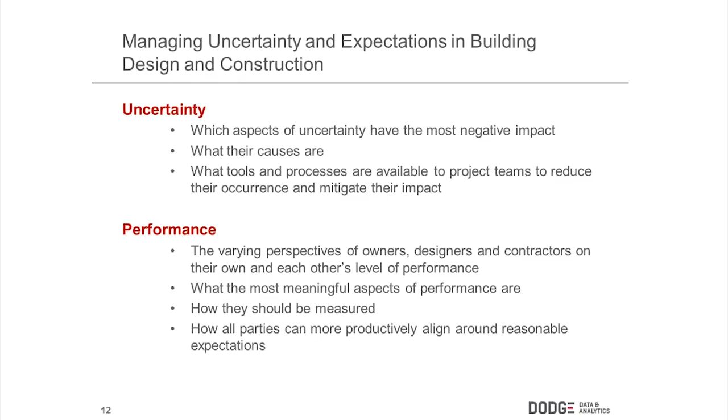So the hope we had for this was to give everybody in the industry some objective data so you can initiate an actual, honest, mature, grown-up discussion with a client early in the process, and acknowledge the fact that you're building a one-of-a-kind prototype outdoors with a lot of baked-in uncertainty.

It is inevitable, and there is a range of reasonableness around the cost and performance impact of that uncertainty. What would then be realistic performance expectations between all parties on this particular project that we're all about to embark on? Is there new design solutions?

Is it a tight labor market? Is it an accelerated schedule? Is it a difficult site? Are we doing anything unusual that's going to create more uncertainty? Let's acknowledge it in advance and not wait until it causes a problem, where everybody else is expecting perfection all the time. And then, what are the top factors to pay attention to?

And then what are the ones that really don't move the needle, so the team can identify and manage risk rather than avoid and transfer it. So much of the contracting strategy in our industry is all about avoiding and transferring risk. We're taking the position that it's much better to identify it and manage it, and then look at what opportunities we have to mitigate that and improve performance.

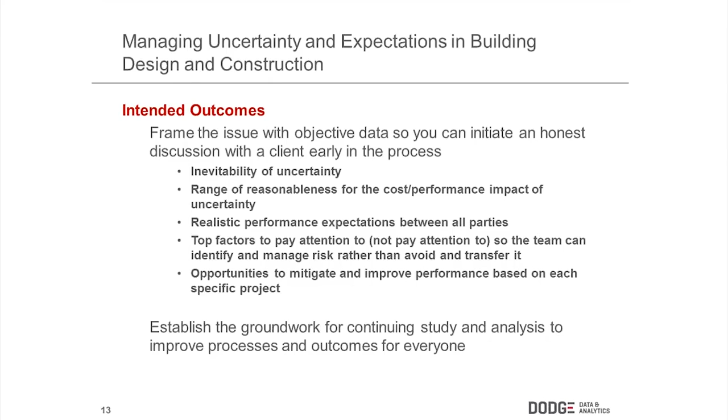So we're hoping to establish the groundwork here with what I'm calling taking the invisibility cloak off of the elephant in the room around uncertainty and performance. And hopefully we're going to take it to a next stage beyond this, so I'd be interested in anybody's thoughts afterwards about that.

So here's how we did it. We did it with 3 different parts. First, we did an association survey. We went out to all those associations you saw, plus a bunch of others, and asked if we could send a survey to their members. We got over 2,500 responses back from owners, architects, and contractors.

That was really to try and identify what were the major issues we should focus on in the next round. The next round was a telephone survey, and that's really how you get your best results in research, because people are guaranteed to complete it and you can capture all the nuance of their answers. So we took the targeted top issues that came out of the association survey and did this targeted phone survey: 155 owners, 82 architects, 72 contractors, all in the United States.

We did a representative range of company sizes and project types, and made sure that most of these folks were involved in complex projects—at least half of their work—because that's where you tend to get most of the uncertainty and then most of the problems.

We've woven their comments throughout the whole report, and as you'll see today, I'll show you some of the highlights. The report itself is broken into 3 major pieces: understanding uncertainty, dealing with performance expectations and the metrics thereof, and lastly, opportunities for performance improvement. I'll take you through some of the highlights, but I encourage you to take a look at this.

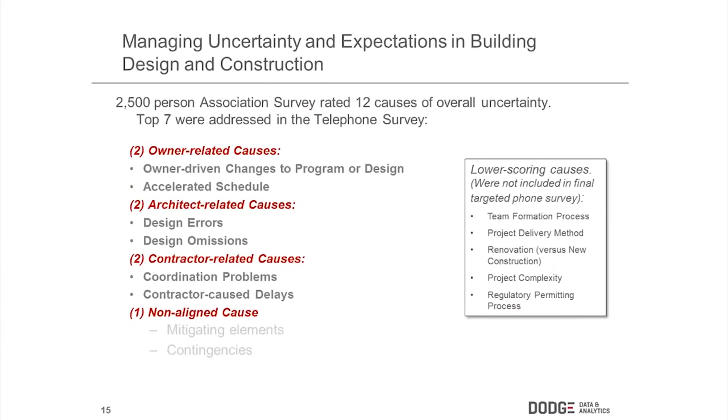So let's look first at understanding uncertainty: what are the top drivers, and how is it specifically impacting quality, cost, and schedule? In the big survey, we went out with 12 different causes of uncertainty and asked people to rate them for us. It was pretty interesting because the top 7 really came out very strongly, with a big drop-off to those you see on the right, which weren't rated as things that move the needle in terms of causing uncertainty.

When you look at those 7, they tended to break down into groups. Two were very clearly owner issues—owner-driven changes to the program or design during the project, and setting an accelerated schedule. Two were definitely design-team related—design errors and design omissions. Two were very much about the build team—coordination problems and contractor-caused delays. And the last one is really a non-aligned cause: unforeseen site or construction issues, things nobody anticipated, but when they happen, you have to deal with them. Those are the top 7 out of the 12.

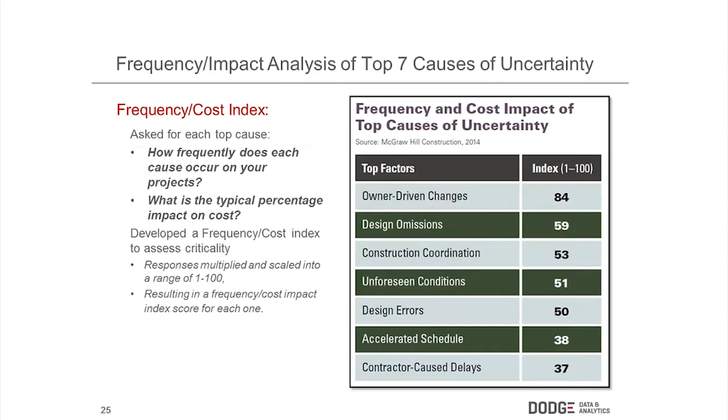So we developed this frequency cost index to assess the criticality of each of the top 7, spread out over a 1 to 100 scale. You'll see that owner-driven changes are really the killers here, definitely the top thing. Next is a cluster in the middle with design omissions and design errors, then unforeseen conditions along with construction coordination. Accelerated schedule, although it creates problems, actually scored relatively low on that frequency index.

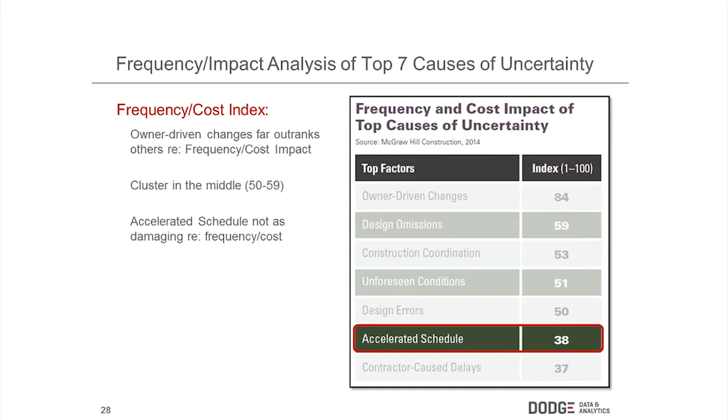So we took a deeper dive behind the owner program changes, the specific design errors and omissions, their frequency, and the drivers behind construction coordination issues. Because in order to understand these, it's important to see what's driving these things on the owner side, the design team side, and the construction side.

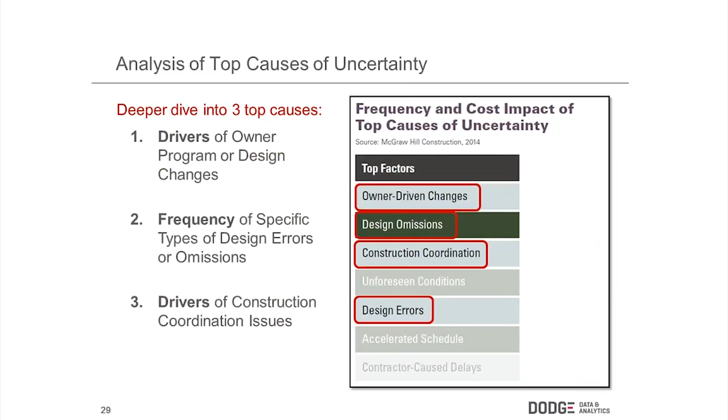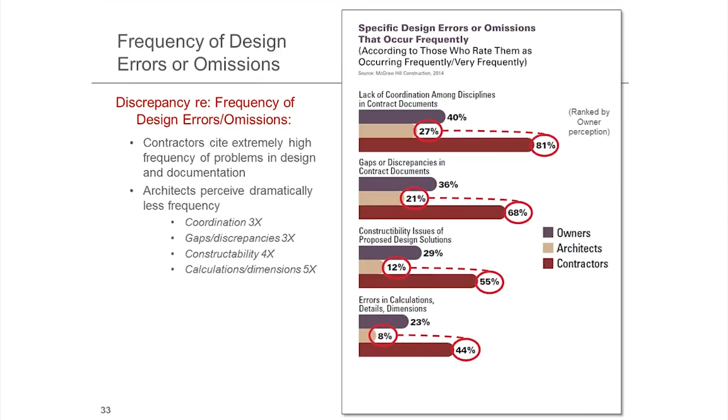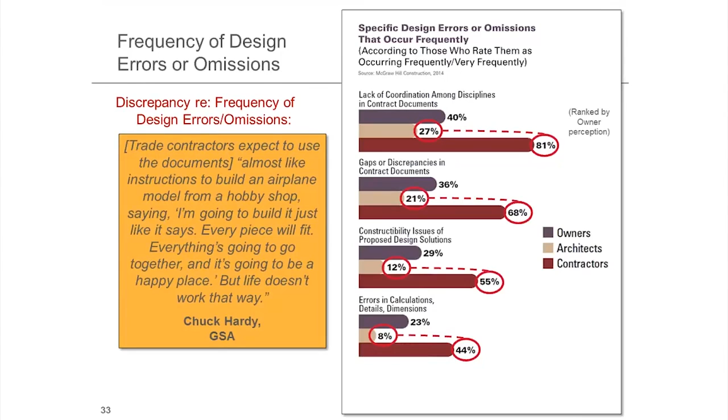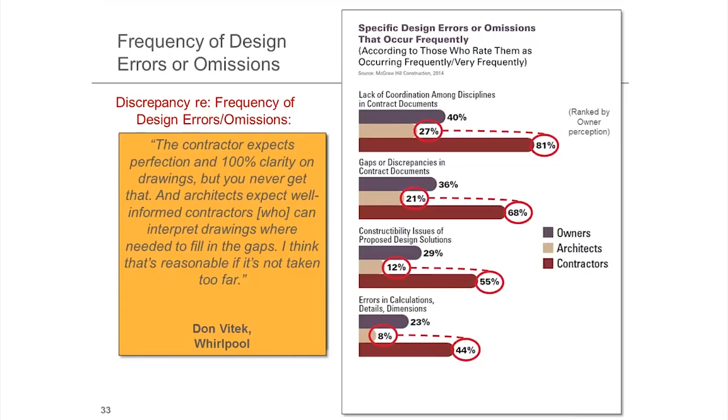Chuck Hardy from the GSA, as a public owner, says trade contractors think it's like getting a set of instructions to build a model from a hobby shop, and it just doesn't work that way. Don Vitek from Whirlpool says the contractor is looking for 100%, but it's just not realistic. I think quotes like this from very well-known owners can be extremely educational for the owners that you work for.

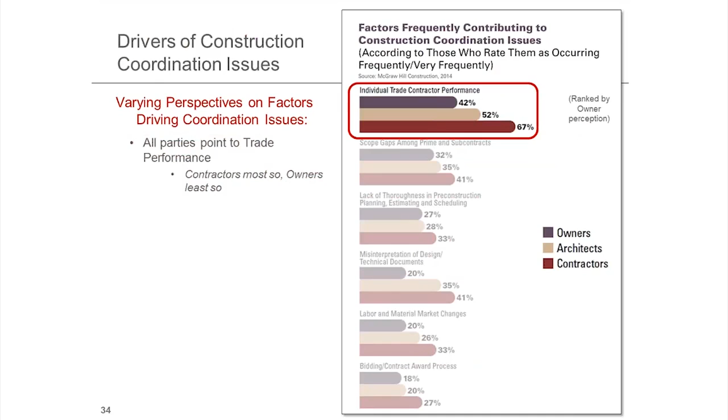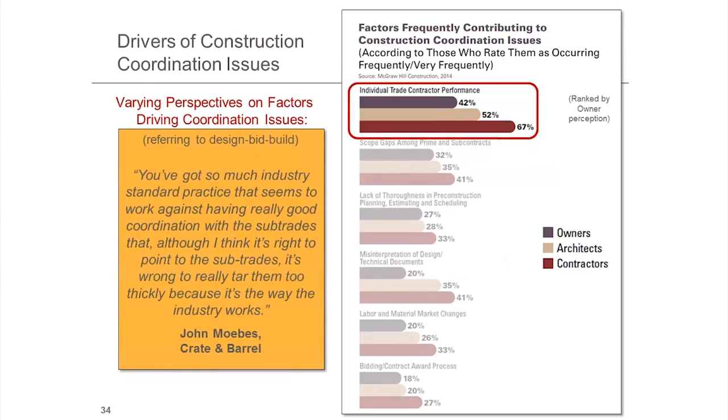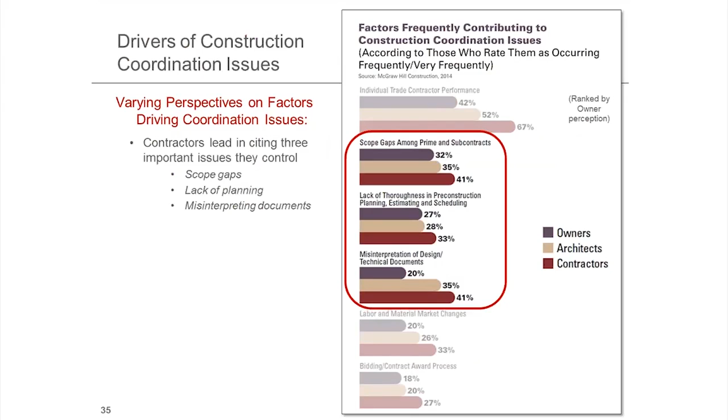Around coordination issues, the factors frequently contributing to that - you're clearly seeing that contractors are pointing very hard at the individual trades. But then John Moebes says, in a design-bid-build situation, you're bringing the trades in so late you can hardly blame them for the fact that a lot of the problems end up on their plate. There's an interesting thing where these are clearly contractor issues, but they're relatively willing - in most cases more willing than others - to point to themselves on scope gaps, lack of planning, and misinterpretation of design documents. So the contractors are a little bit more willing to step up and express ownership in their contribution to driving problems.

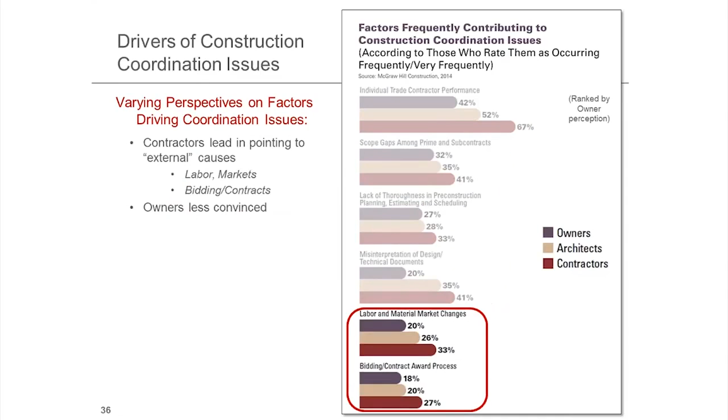So next what we want to do is take a look at what all this means for performance expectations and what ought to be measured.

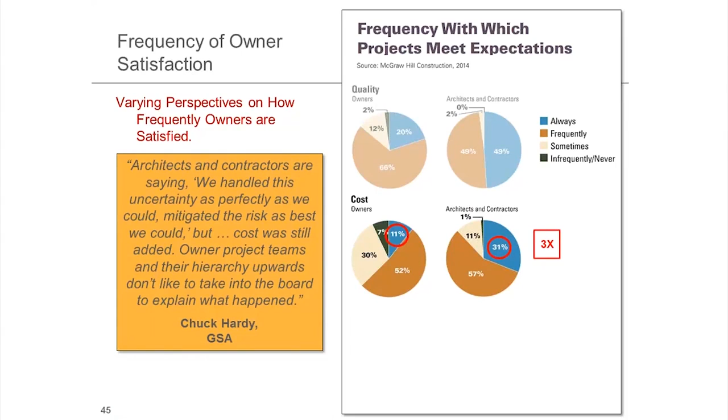Chuck Hardy says architects and contractors often feel they handled this uncertainty as perfectly as they could, mitigated the risk as best they could, but the cost was still added. Owner project teams and their hierarchies don't like to take this to the board to explain what happened.

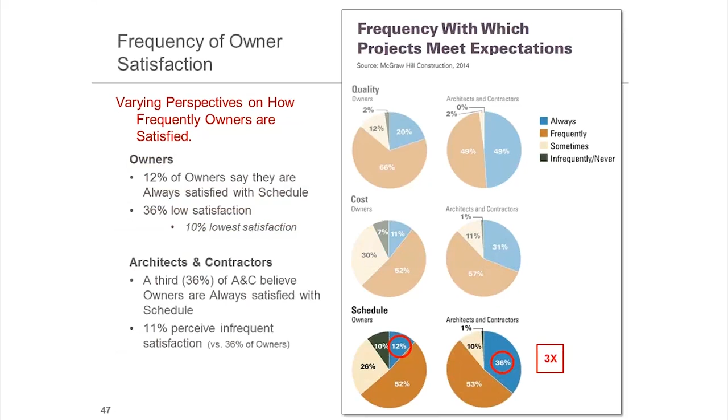Looking at schedule, only 12% of owners say they're always satisfied with schedule, and 36% have a pretty low satisfaction level. Yet more than a third of architects and contractors believe they're providing that satisfaction.

We're not here to say one side's right and one side's wrong. What we're saying is there's an awful lot of stuff we're not talking about. As you sit around the table with all the other players on a project team, you have to realize the perspective they're bringing to this, and that there's an almost built-in expectation of problems occurring around certain things, and differences in those perspectives.

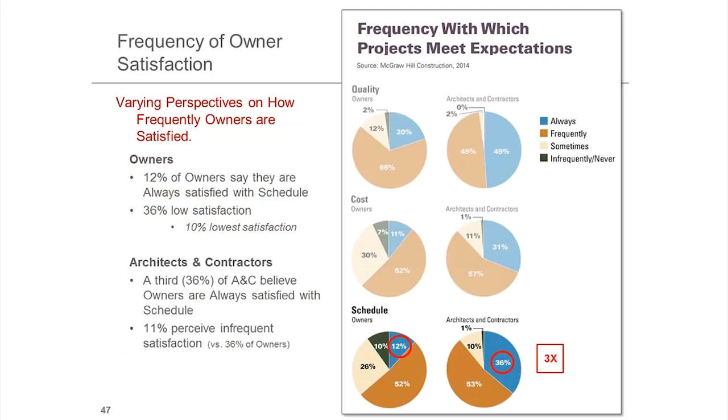It's important to get at this stuff early and talk it out, because here's quantified information showing just how differently owners and design-build teams feel about the level of satisfaction owners are getting. Don Vitek puts it well: even though a project ends up being delivered on the agreed-upon schedule, it may have been revised several times, and that poor owner rep got beat up several times, so he still has a bad taste in his mouth.

So then we get into more of the issues of performance, and what it means to be high performing, and what about performance ought to be measured, can be measured, is most easily measured, and most meaningfully measured.

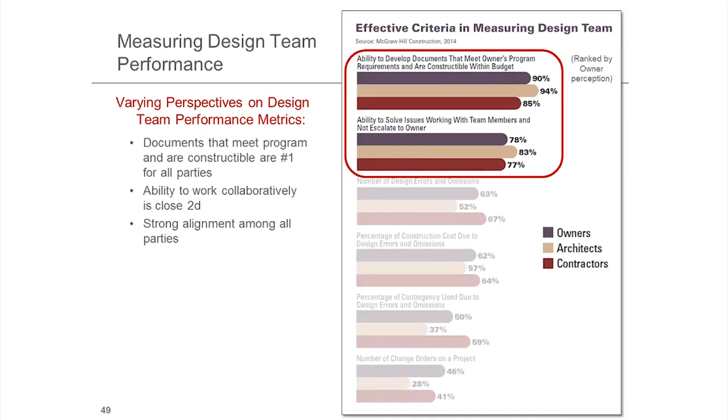There's varying perspectives. Starting with design teams, the ability to develop documents that are constructible and meet the program requirements is absolutely everybody's number one thing. Secondly, and very interesting, is the attitude and collaborative nature of working together as a team, the ability to solve issues without escalating them to the owner, which came out as the second most effective thing to measure in terms of design firms.

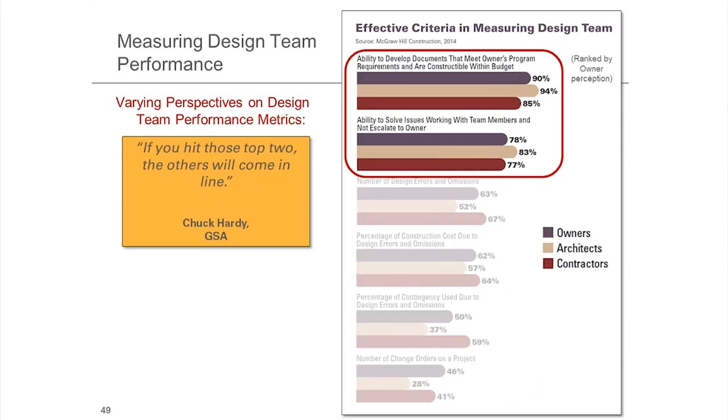Chuck Hardy says if you hit those two, all the rest of these things will come into line. The rest are more quantified things, the number or percentage of change orders, contingency use, and things like that. You're seeing these red lines a little bit longer—contractors are a little more comfortable holding design teams to that. The tan lines are shortest because design teams are the least comfortable being held to those kinds of numerical, quantified measures of their performance.

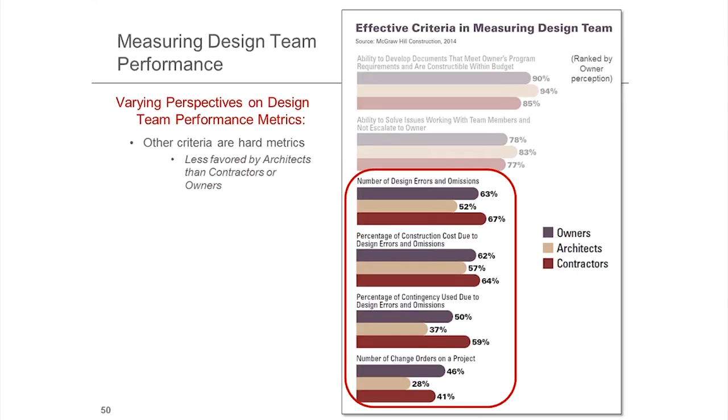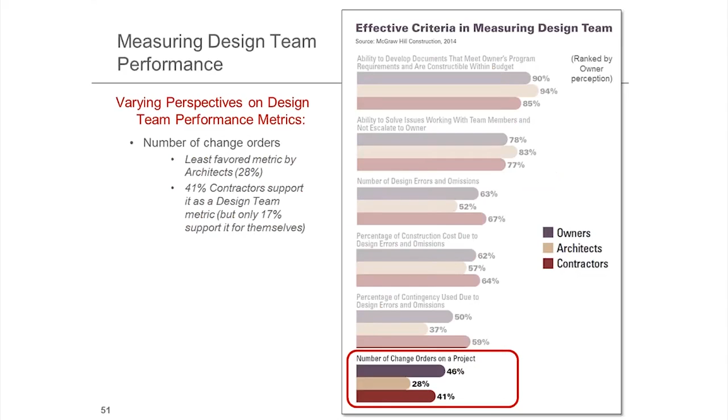The number of change orders actually, thankfully, came in pretty low, because as most people will agree, it's not really a legitimate way to measure performance of anybody, since change orders can be generated by so many different things.

Then we get into, in terms of design firms, can you expect a perfect set of construction documents? We asked people about something that would withstand basically unlimited scrutiny by contractors and fabricators, with no mistakes and no omissions. Is that even possible? It was pretty interesting to see that only 7% of owners said it was possible, but 13% of architects said it was possible—even more architects than owners.

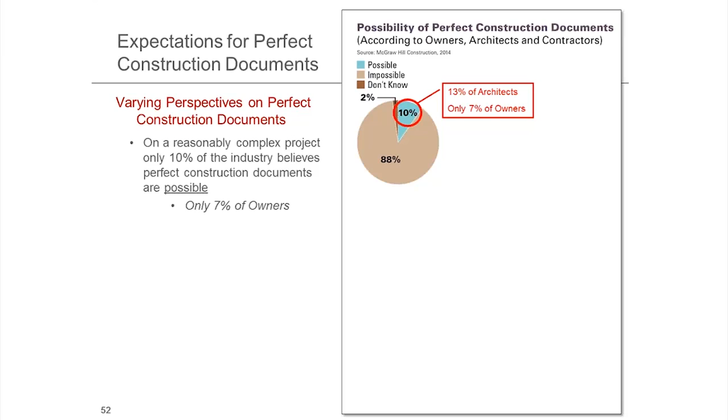But then we asked owners, is it reasonable to expect that, even though only 7% say it's possible? 21% said it's reasonable. So this is a really important disconnect—you've got a whole lot of people who, even though they realize it's not possible, are still going to walk into that project team meeting expecting perfection. You've got to talk this stuff out intelligently in advance and identify the things that are unrealistic.

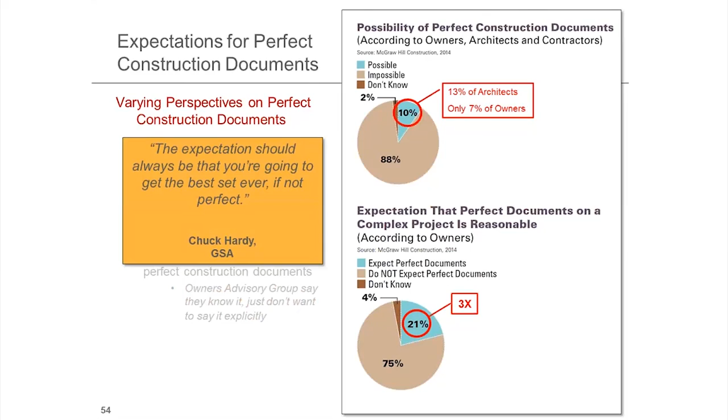Here you've got Chuck Hardy saying the expectation should always be you're going to get the best set ever, if not perfect, on every single job. So that's what the owner is thinking.

In terms of the cost of design mistakes, if we acknowledge that there's baked-in uncertainty which is going to cause errors and omissions issues in those contract documents, what is a reasonable amount to allocate for that? So first we asked owners: do you think you will never have a problem going forward?

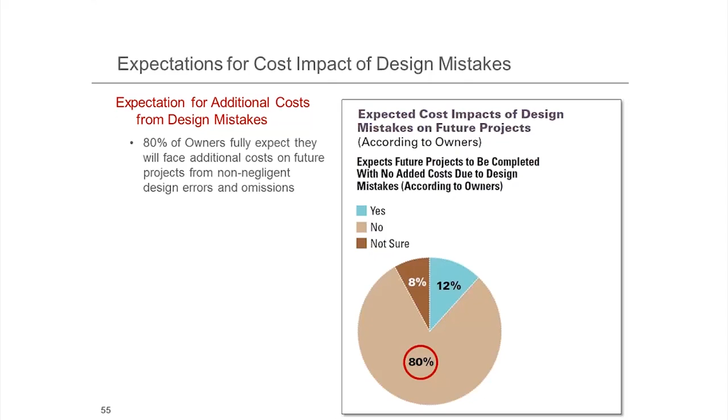Only 12%, thankfully, said that they think that they should never have any problems going forward. 80% said, I understand, I acknowledge the fact that there's going to be design errors on my future projects.

So then what we got into is, what do you believe is a reasonable range for a normal additional cost that's going to be due to non-negligent design mistakes in those construction documents? It went everywhere from 0 to frankly north of 20%, but the average came out in that 3 to 5% range.

And nobody's ever done this before in my career, has actually quantified this kind of an impact number to get 115 major owners who do complex projects in the U.S. to go on record saying, on average, actually something in the 3 to 5% range is acceptable for a cost overrun and cost impact due to mistakes in construction documents.

And Chuck Hardy said it. He says, I think we're 3 to 5% close. Hey, man, that's probably a good number. This is really important stuff.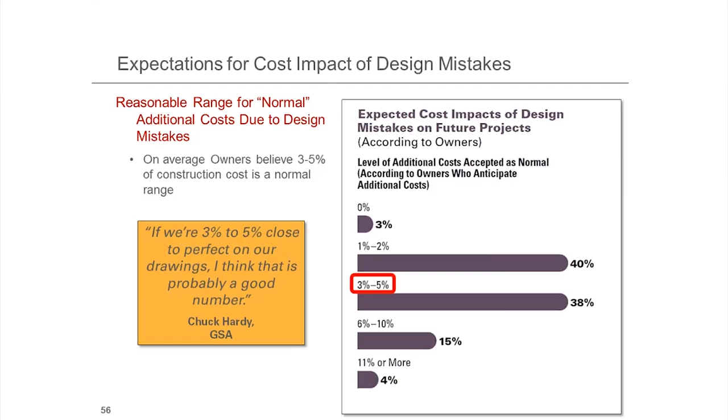And again, you now have a tool to take to an owner and say, look, here's what 115 objective owners said is a reasonable expectation for standard of care, somewhere in that 3 to 5% range, not the 0% range.

So in terms of measuring the build side of the team, the thing that came out number one is the ability to solve issues without grandstanding and escalating it to the owner. That scored highest with everybody, that collaborative performance.

And Chuck Hardy says, once a contractor gets in the driver's seat, that's a great metric. And if they're doing that right, most of the rest of these that you'll see in a second here would be minimized.

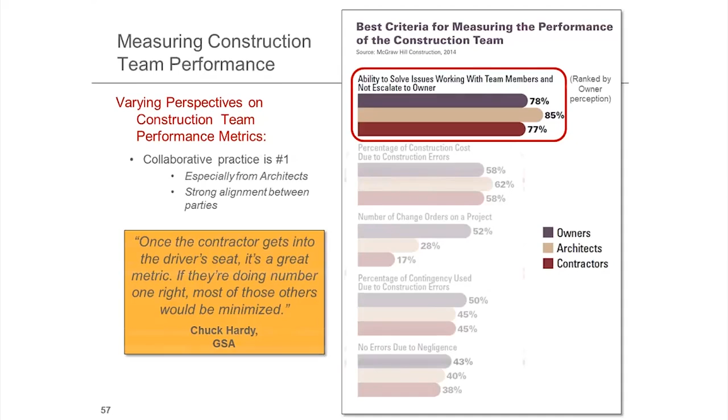So in terms of percentage of construction costs, these are those hard numbers: the number of change orders, percentage contingency used, no errors. These are things which everybody feels more comfortable holding a contractor to because they actually have more control over these things. And you can see, especially the owners, those dark bars are fairly long all the way through there.

But Don Vitek says, construction is not an exact science. Everybody wants it to be, but it's not. So it's not that there's an issue, but it's how does that contractor recover from that issue?

And I think for all the contractors in the audience, this is a really important quote to take to your owners, because it gets it off of the fact that there were issues and it gets it onto how good you are at dealing with those issues. Because that's really what they should be focused on, what they should be measuring, and what they should be paying you for.

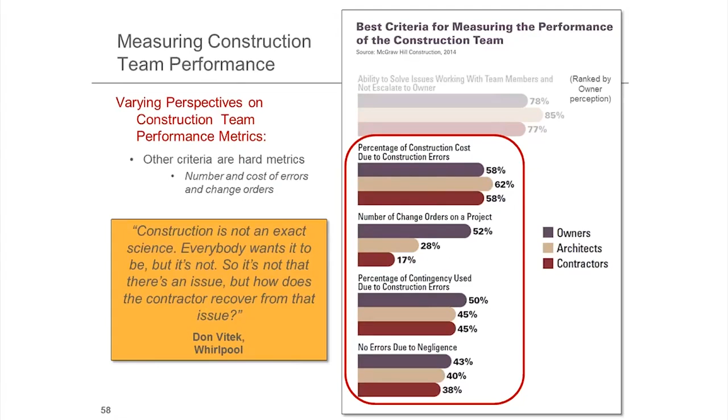So again, we get into this thing of number of change orders on a project, and you see contractors are least interested in having that being held to that.

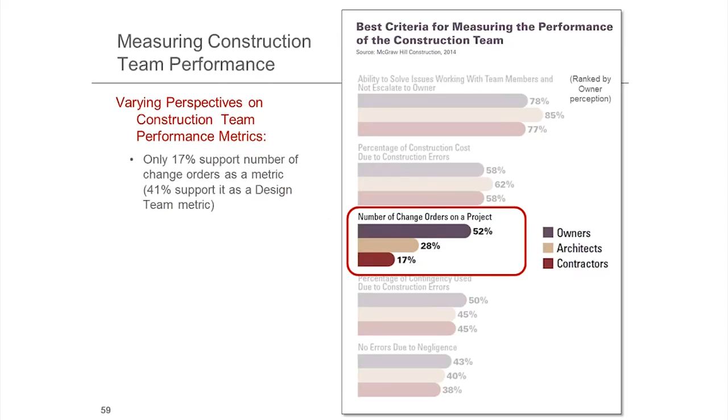And Don Vitek says a great thing: change orders come from a lot of different places. Some are good, and they benefit the end product. It's not enough just to judge it on numbers. Is a 100 change order project worse than a 20? You can't say that, right? So this is really enlightened wisdom.

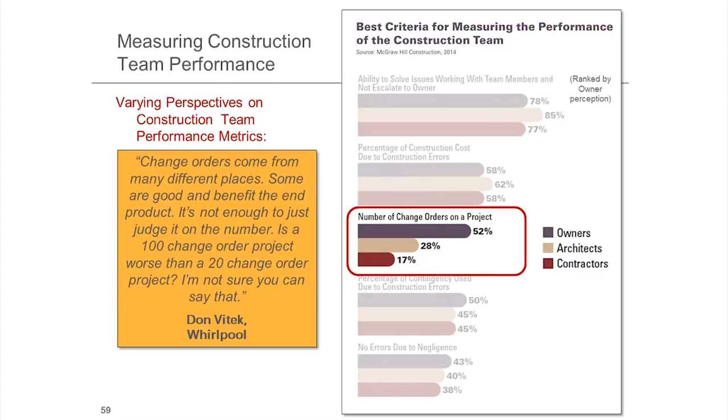So then in terms of the same perfection question, is it even possible to have perfect construction performance? Where 7% of owners said it's possible to do perfect construction documents, got a lot more thinking that it is actually possible to have perfect construction performance.

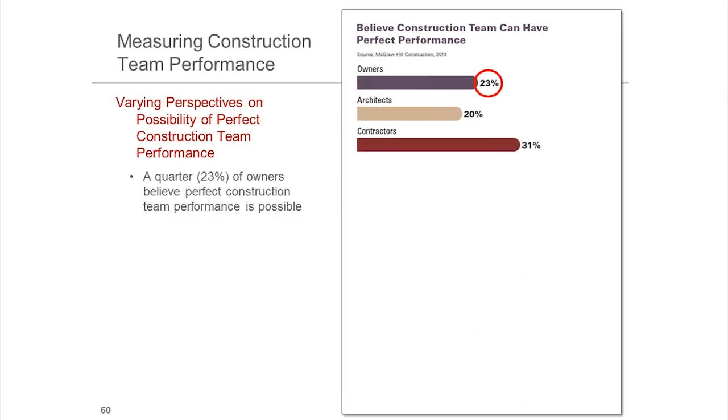And then we asked the same thing about the reasonableness of expecting it, and now you get about 3/4 of owners saying they think it's actually reasonable. So where only maybe 20% of owners thought it was reasonable to expect perfect CDs, he got the vast majority actually thinking that they can hold the construction team to perfect performance.

So it's really, this isn't all about errors and omissions in construction documents by any means. It's really important for contractors to also have this kind of mature discussion, really look at the project that you're doing, identify the things in advance which are likely to cause problems, and just accept it and acknowledge it, and don't hide from it, don't be afraid of it, don't be ashamed of it. It's real, and we've pulled together the data here to back some of this stuff up.

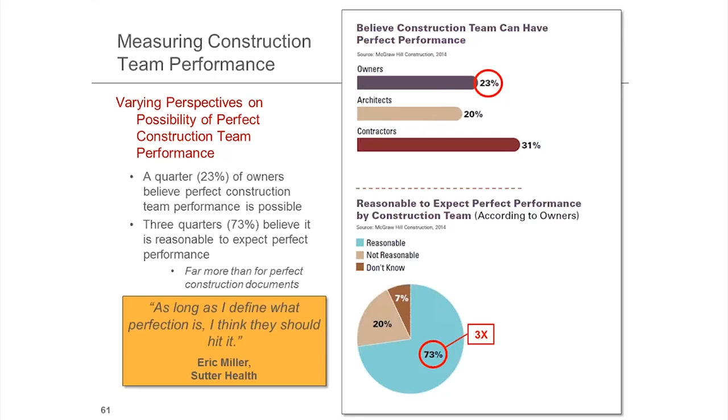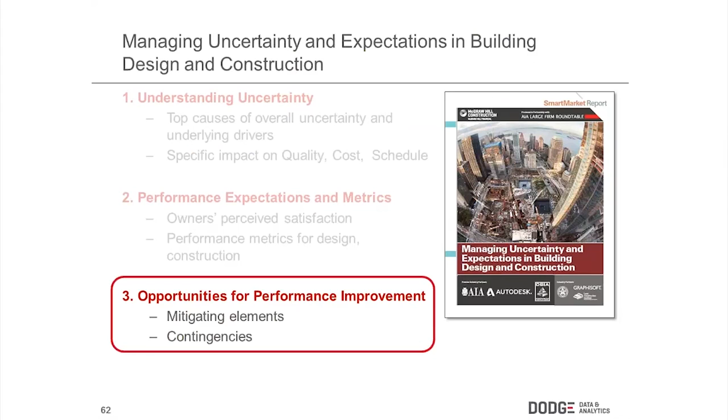So lastly, what we looked at was opportunities for performance improvement. And it's not as if we're prescribing these things, but what we've done is we asked folks to say, in your experience so far, what have you found to be helpful? So this is the last third of the report and a pretty interesting aspect of it. I think this may provide some interesting fuel going forward for us to do some other things.

But we looked at 13 different factors, and we had everybody rate these - the owners, the design teams, the construction teams - from no impact to very high impact, that same 1 to 5 scale. And they broke down into sort of basic topics: the importance of the owner's role, things which were about better integration and collaboration, using building information modeling technologies, how you put the team together and how you approach the project delivery strategy, and then the importance of the budget contingency.

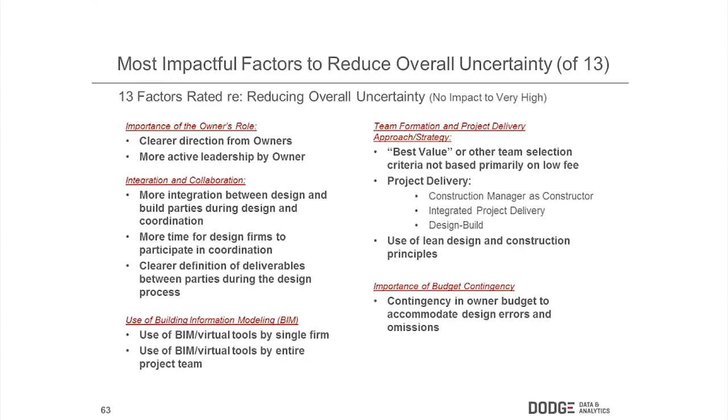So taking a look at how some of these things came out in terms of the most impactful factors that are going to help reduce the overall uncertainty, you're seeing that more integration absolutely came out as the number one most important, with very strong alignment between all the parties on that.

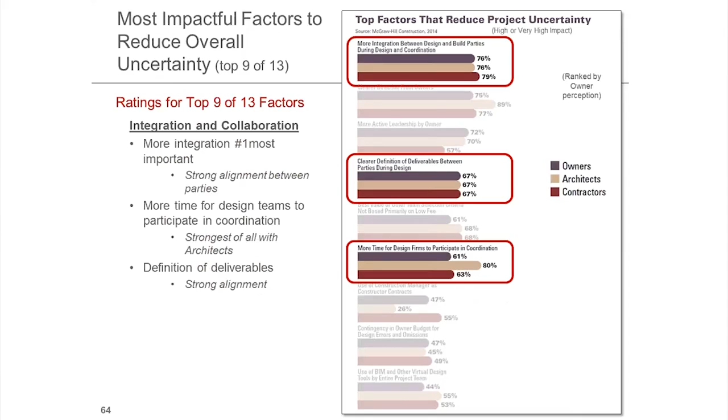The definition of deliverables also had very strong alignment. Eric Miller from Sutter Health, if you're familiar with them, they do more IPD than anybody else out there, and were early pioneers in it. What Eric says is that open conversation, the open platform, the big room, whatever you want to call it, has helped it. Conversation drives documents that are constructible. And if you go back to the very beginning, that was the number one most valued thing about the design team's contribution, that constructible set of documents.

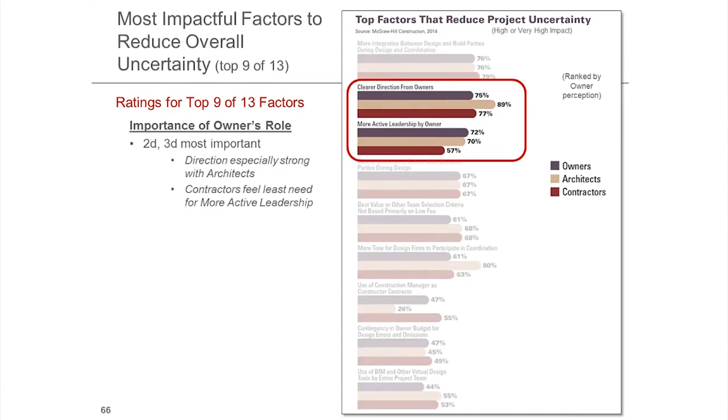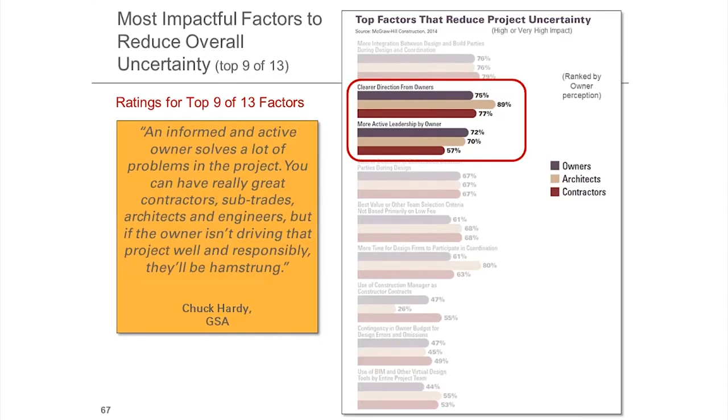Secondly, things came out around the owner's role, with direction especially strong from the architects. As Chuck Hardy will say, an informed owner solves a lot of problems on a project. You can have great contractors, subs, architects, and engineers, but if the owner isn't driving it, they'll all be hamstrung. This is a terrific quote to take to an owner to encourage them to be engaged, and great data from the industry to support that. As Craig Russell says, because they pick the team and design the strategy, owners have the ultimate responsibility for the outcome.

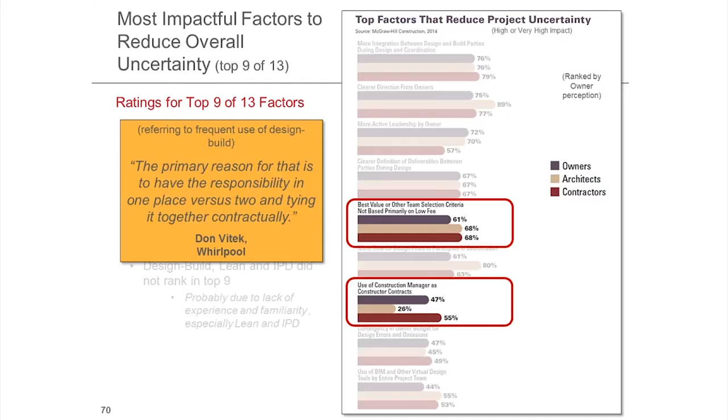Coming in third among these clusters was really more around best value, team selection, and use of CM. The primary reason is that they have responsibility in one place versus two, tying it together contractually. That's why Whirlpool does as much design-build as they do.

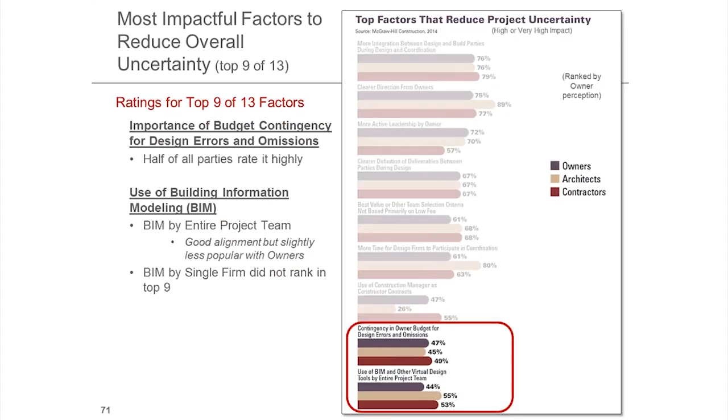And then lastly, the last cluster here is around contingency, owner budget, and the use of BIM. If teams are coming into the project like-minded around BIM, it definitely helps reduce the overall uncertainty. Eric Miller of Sutter Health, they're big BIM users as well as IPD.

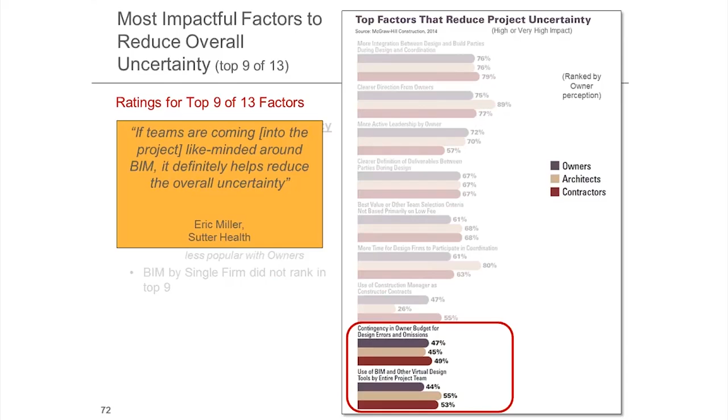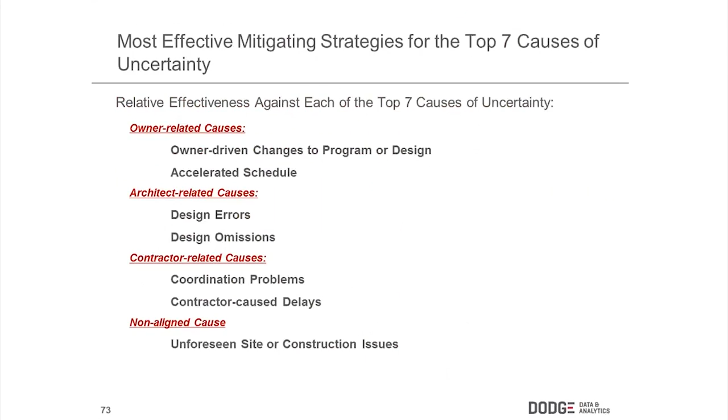So getting to the aspect of contingencies, this was a really interesting part of this. We had Jerry Lea from Hines saying that they take 3% of the construction contract amount and give it to their staff in the field, fully expecting that 3% is going to be needed in the field, a little at a time, to cover the stuff that normally occurs. That is so enlightened. Just imagine everybody's life if all major owners, not just Jerry Lea and Hines, did that. It just makes us so much smarter to get through the project.

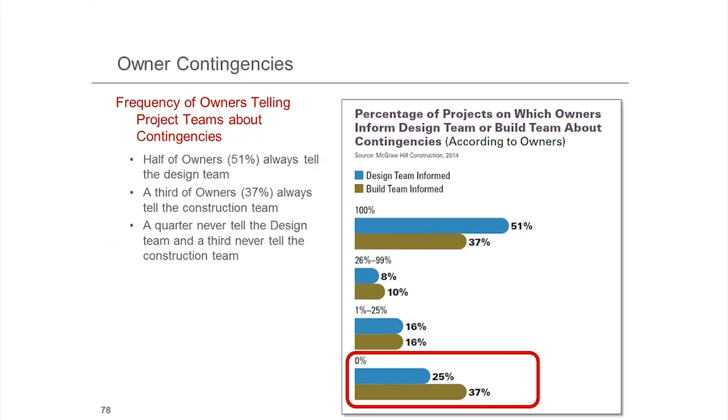And then you look at how many never tell. A quarter of owners never tell the design team, 25% never tell, and 37% never tell the build team. So you really have a lot of discrepancy in terms of what owners do once they've established a contingency, in terms of how much they actually share it with the team so they can work together.

And what Boyd Black from the University of Chicago said, interestingly, is, I found it to be a constant fight with the design team. Why? I'm not letting them use that money. So the takeaway here is, if you want to have this information shared with you, you have to be responsible about not considering it to be part of your project budget, but indeed it is for special situations.

Then we asked owners, do you have a real standard way of actually developing a contingency in a project? Or do you just use the same 5% all the time, no matter what? It turns out that two-thirds really don't have any actual prescribed standard risk assessment process by which they develop a contingency, and only 24% said they did. So there's an awful lot of invention on the fly out there around establishing a really important aspect of a project, that financial project contingency.

So we see that this could be a very important thing for us to focus on going forward. Is there a way you could profile a project in advance across maybe 12 different categories and score it, and say a project like this really ought to have a 20% contingency versus a project like that, which you could get by with 2% because it doesn't have those same drivers. There is none of that out there, and it's incredibly important. Without that sort of standardized way of doing it, you really have to deal with this through conversations as early as you can with your owners.

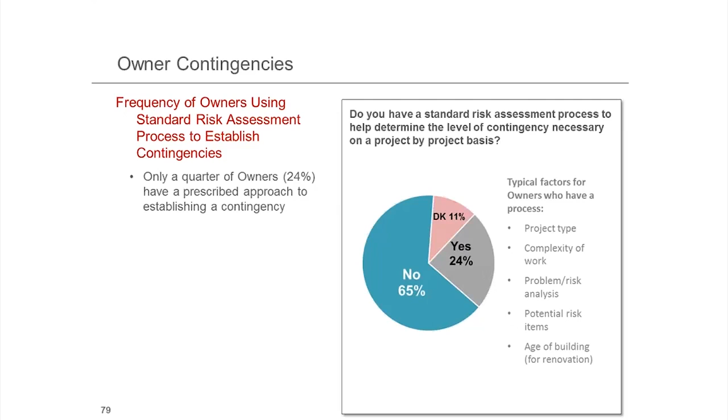So, in summary, looking at the overall here, it was kind of interesting to see how the controlling party for each of those factors of uncertainty generally underperceives the impact of the causes that are under their particular control, and tends to point to the others around the table as being the ones who are really more importantly driving that uncertainty.

In terms of expectations, I was actually pretty surprised at how much less owners were satisfied with architectural and construction performance than that was perceived by those who were providing it, because I certainly thought I was always doing a bang-up job. So it's pretty interesting to acknowledge there's a real perception difference there, especially around cost and schedule, more so than quality.

You had a lot of varying perspectives on what ought to be measured for design and construction performance, and perfect performance was actually seen as more realistic for construction than design. So I think build teams are being held to a higher level of expectation than design teams are.

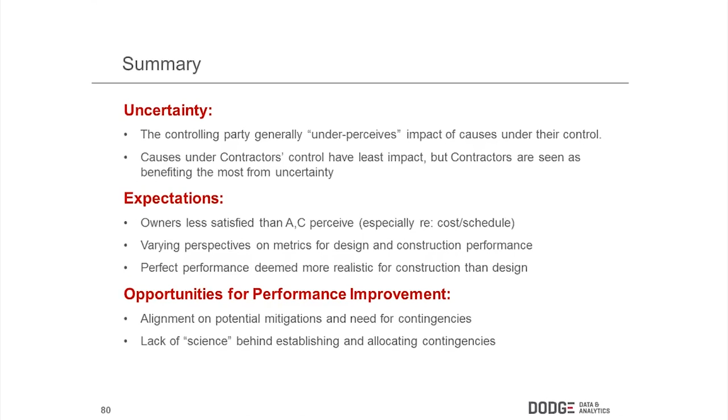In terms of opportunities for performance improvement, the metrics matrix is in the report. There's a lot of other breakdown in the report that gets into a great deal more detail about it, so I'd refer you to that. There was a fair amount of alignment around what some of these potential mitigations could be against some of those causes, but the thing which was shocking to me, and I think really needs a lot of work out there, is the lack of science behind establishing and allocating contingencies.

So the report, much like most of our other reports, has some really interesting case studies in it. One sings the praises of a high level of end-user engagement, the Mozilla headquarters, interesting design-build stories, IPD stories, minimizing uncertainty through what Creighton Barrow calls design-build-bid, where they actually do design-build on certain aspects and very aggressively bid other aspects. Again, these can be very useful both for you and to share with owners you work with, to show there are different ways to go about things that other people have found really bring down the level of uncertainty and its negative impact.

There's also a series of sidebars, which are typical of what we'll do in these SmartMarket reports. There's commentary all the way through from that owner advisory group, and I can't steer you strongly enough toward that, because there's so much wisdom in it. We also deal with how lean processes have been able to reduce uncertainty, and talk specifically about how BIM helps manage uncertainty. We have claims consultants talking to us about this issue and how they deal with it. And then, on the cost of imperfection, we pulled together some secondary research on reducing error-induced uncertainty.